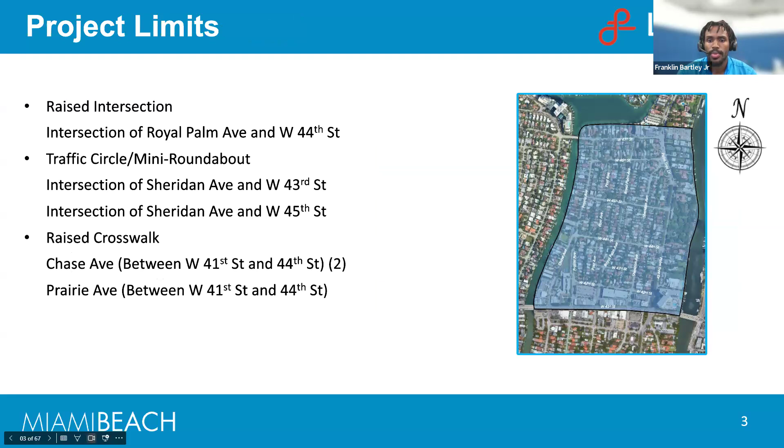So these are a few of the devices we'll be going over today: the raised intersection, the traffic circle, mini roundabout, and raised crosswalks. We'll also be implementing speed tables and speed humps at various locations as well.

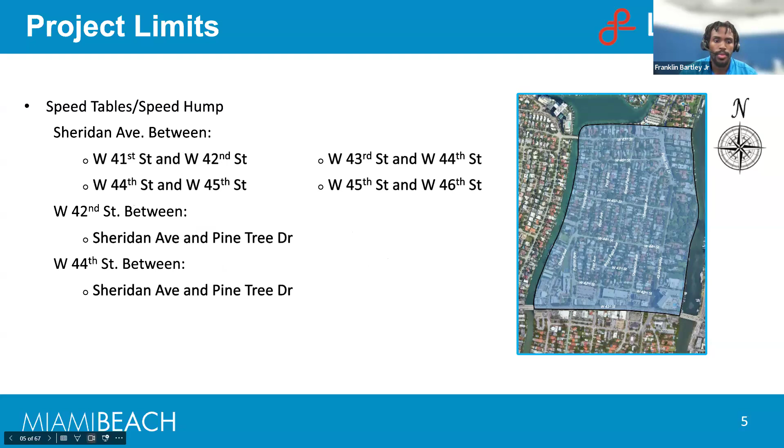Our design process was meant to really adhere to ensuring that everything is data driven, both effective and inclusive of community support and input. This is why we follow this project design methodology.

Preliminarily, we received some field concepts, then we go into preliminary designs, which are the 30% plans — early stage plans created just to detail the proposed improvements. Then we have to gather community input from residents, city officials, and city staff. This is where we are right now, currently in this community meeting to gather that input. We've already sent out the 30% design for their input as well.

Our final design will be finalized through integration of comments from city staff and comments also provided by the county. They will ultimately be the governing body that approves the permit set of this traffic calming design plan in order for us to go to construction with it.

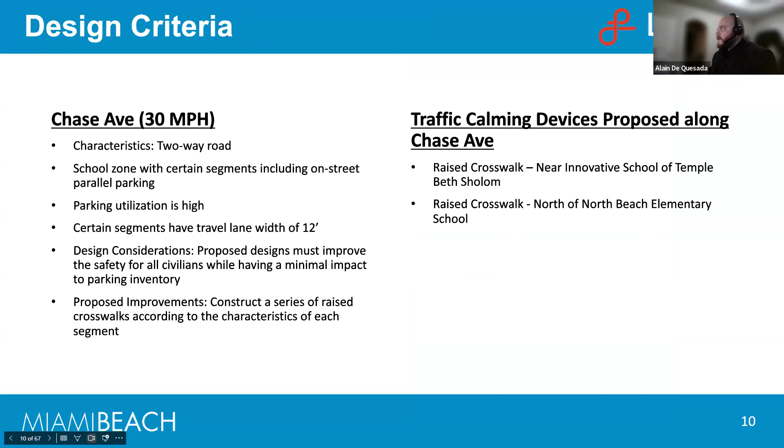This is a 30-mile-per-hour road, and the proposed improvements are raised crosswalks. The raised crosswalks will constitute an elevated platform that allows pedestrians to safely cross the street. The proposed design elevates the street approximately 6 inches to be flush with the proposed curb and gutter. New signing and pavement markings will also be provided to alert motorists as well as pedestrians to the new raised crossings.

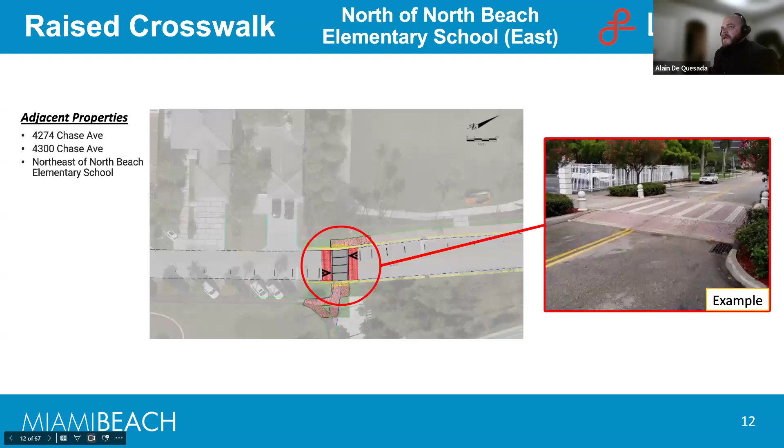Existing parking will not be affected aside from a handicap parking space located near Innovative School of Temple Beth Sholom. The impacted handicap parking space is to be relocated 20 feet to the south of its existing location. To prevent any drainage issues with the proposed raised crosswalks, we are proposing a channel gutter to convey the water to its appropriate inlets.

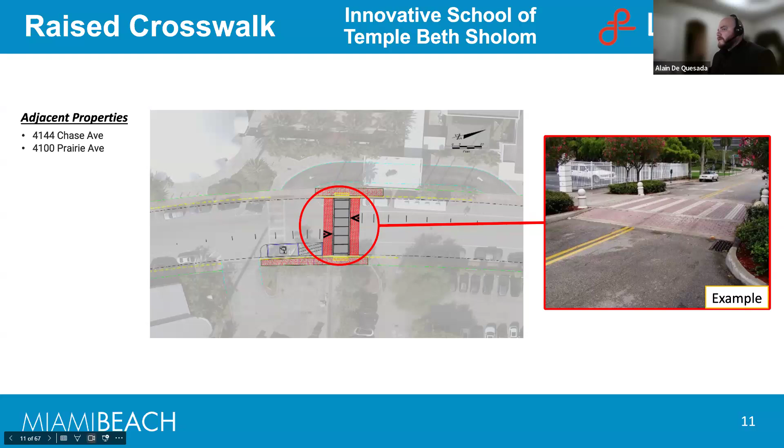Our next location is Prairie Avenue between West 41st Street and West 44th Street. This is a 30-mile-per-hour road that also constitutes a raised crosswalk. As you can see, we have connecting sidewalks, which will allow pedestrians to better cross the street, as well as have no impacts to the bicycle lanes.

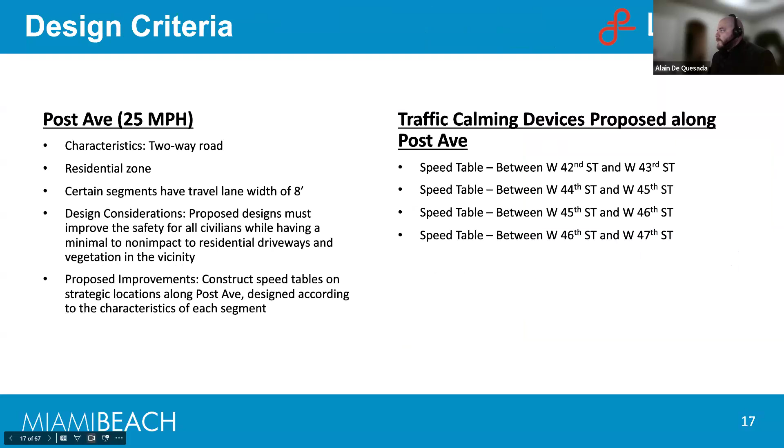Our next location is Post Avenue between West 42nd Street and West 47th Street. This is a 25-mile-per-hour road, and it constitutes 4 speed tables: one between West 42nd and 43rd Street, West 44th and 45th Street, West 45th and 46th Street, and West 46th and 47th Street.

Speed tables and speed humps will constitute an elevated road, 4 inches, at designated locations for traffic calming purposes. New signing and pavement marking will also be provided to alert motorists to the new raised speed tables and speed humps, as well as no existing bicycle parking or bicycle lane is to be affected or modified based on our proposed location.

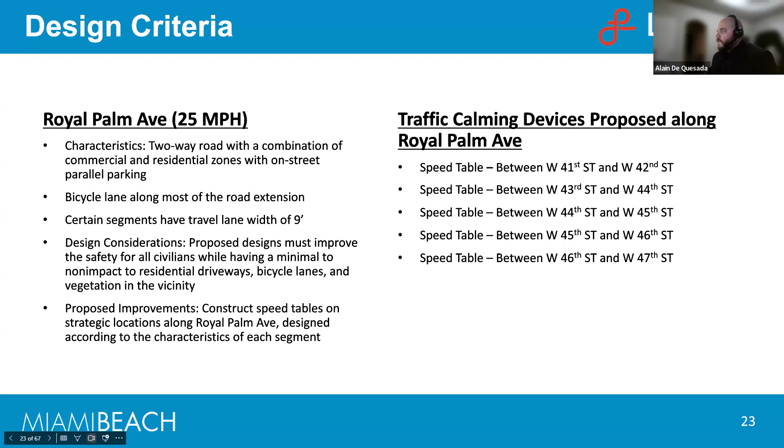Our next location is Royal Palm Avenue between West 41st Street and West 47th Street. This constitutes several speed tables between West 41st and West 42nd Street, West 43rd and West 44th Street, West 44th and West 45th Street, West 45th and West 46th Street, and then West 46th and West 47th Street.

To prevent any drainage issues with the proposed speed tables and speed humps, we are sloping the outside edge of the speed tables and speed humps 6 inches from the edge of pavement or bicycle lane. This will prevent any ponding associated with the raised pavement.

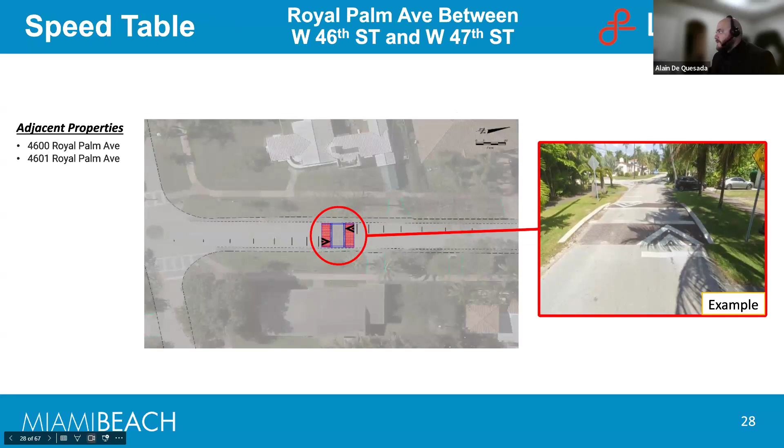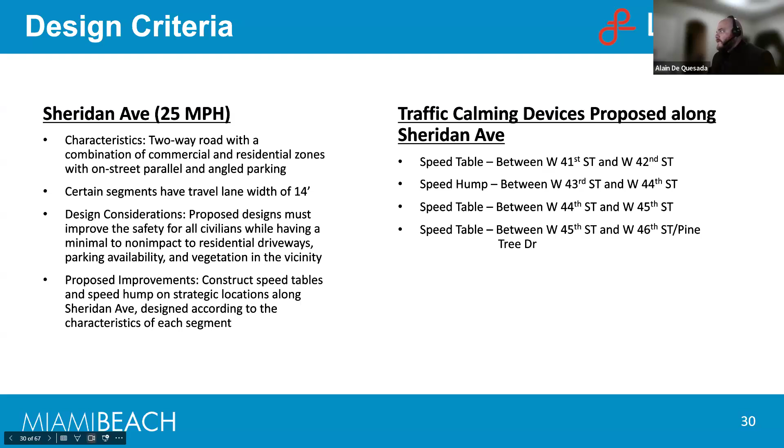Our next location is Sheridan Avenue between West 41st Street and West 46th Street. This is a 25-mile-per-hour road that will constitute 3 speed tables and 1 speed hump, located between West 41st and West 42nd Street, West 43rd and West 44th Street, West 44th and West 45th Street, and West 45th and West 46th Street, which is also named Pine Tree Drive.

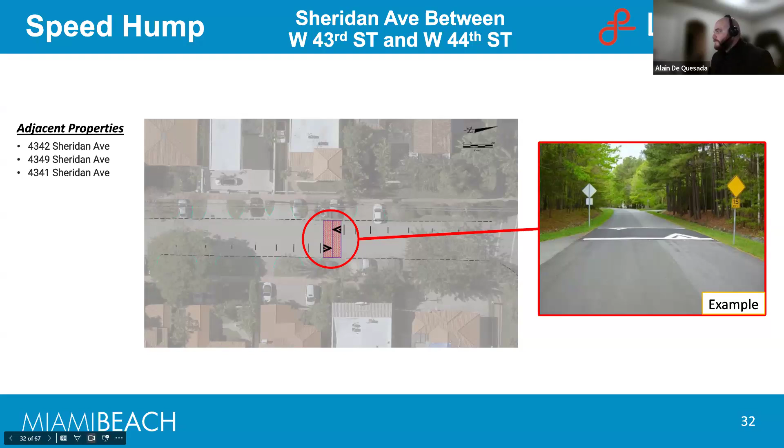Again, as you can see, there is no parking being affected, as well as no bicycle lanes being affected. As you can see, though, there's some parking that current residents use in the swale area. This is where we have gone with the compromise of a speed hump, which is, instead of giving a flat 10-foot surface, just 2 6-foot raised edges. New signing and pavement marking will be provided to alert all motorists of the incoming traffic calming device.

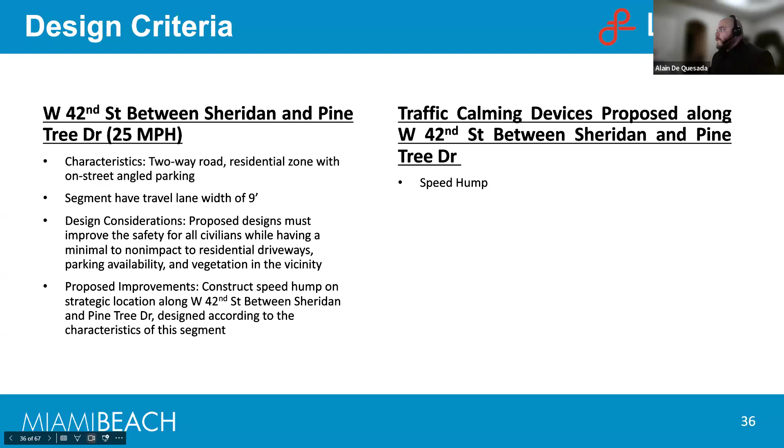Our next location is West 42nd Street between Sheridan Avenue and Pine Tree Drive. This would only constitute a speed hump.

This area, although not clearly shown here due to ongoing construction, as we develop the project we'll get a newer survey that would allow us to understand how the building is being developed and to better locate the speed hump to have less adverse effects on any type of proposed driveways, entrances to a garage, or parking.

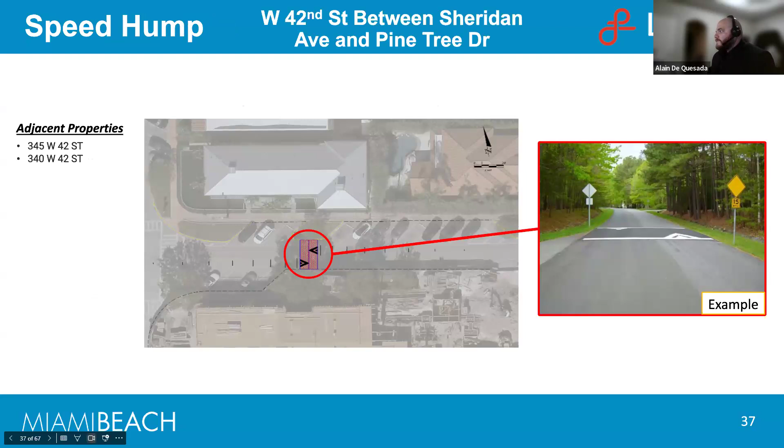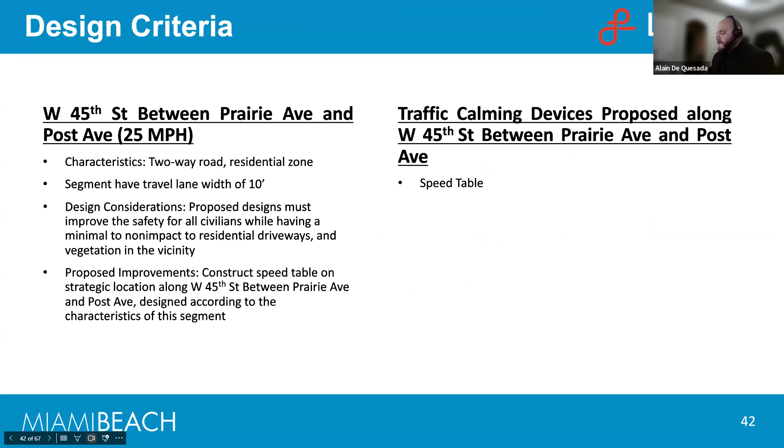Our next location is West 45th Street between Prairie Avenue and Post Avenue. This one again only constitutes one speed table as shown here. To the south of it, although it seems like we're blocking driveways, this is currently used by residents as parking. It's not a designated parking, so this would be some coordination with the residents to better allocate the area and to come up with a good compromise.

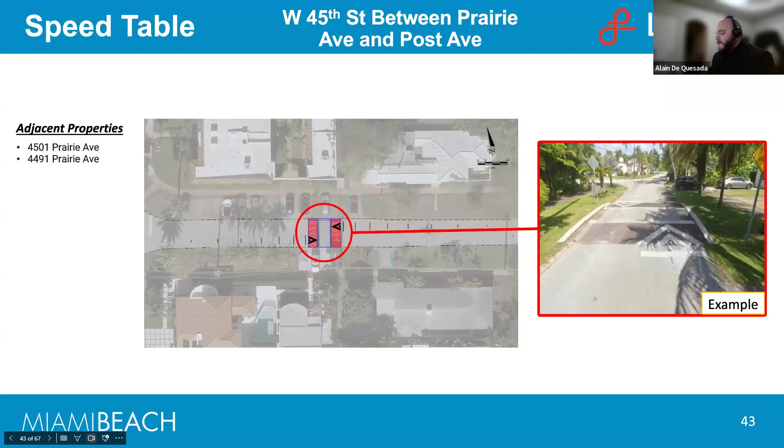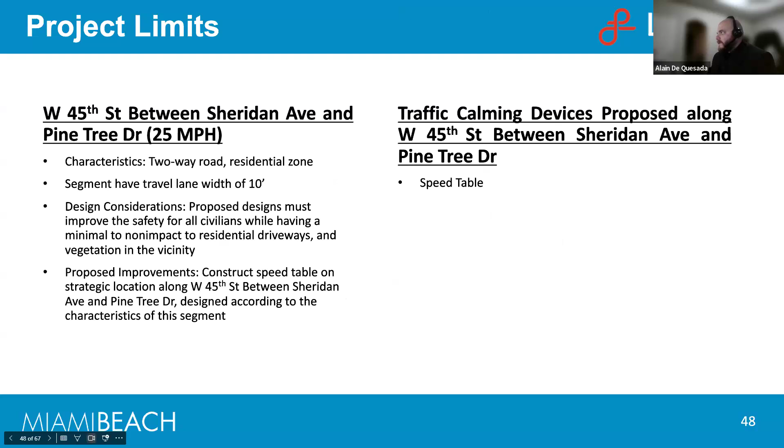Our next location is West 45th Street between Sheridan Avenue and Pine Tree Drive. Again, only one speed table is located there, and we have seen no issues with any parking or any residential amenities.

Our next location is West 46th Street between Post Avenue and Royal Palm Avenue. Again, this is constituted of one speed table.

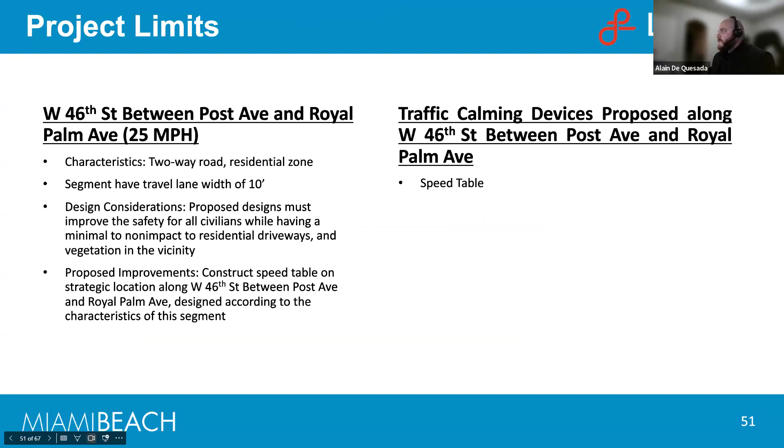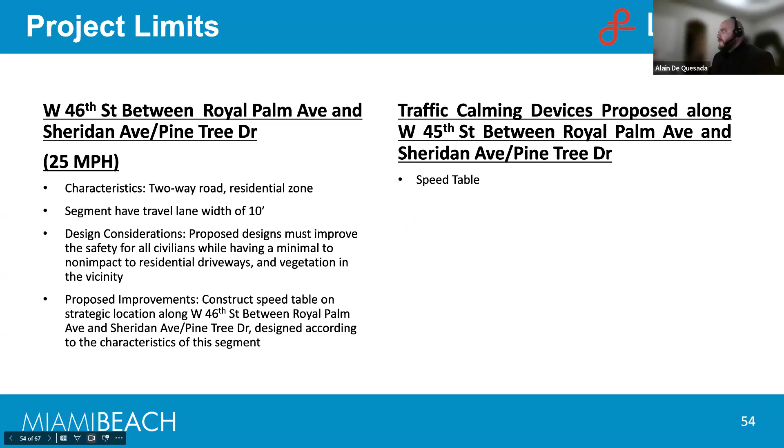Our next location is West 46th Street between Royal Palm Avenue and Sheridan Avenue / Pine Tree Drive. This, again, is only one speed table as shown there.

Our next proposed improvement is at the intersection of Royal Palm Avenue and West 44th Street. This constitutes a raised intersection.

The raised intersection will constitute raising the intersection approximately 6 inches, flush with the proposed curb and gutter areas as shown. New pedestrian crossings with pavers showing the new pathways will be added as part of the improvements.

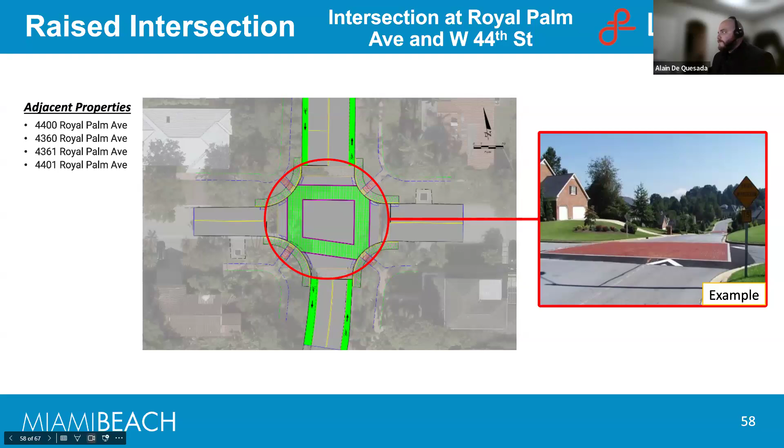Due to restrictions of water conveyance, new inlets will be added and connected to the existing drainage system for appropriate water flow. New signing and pavement marking will also be provided to alert motorists to the new raised intersection, and we will also be milling and resurfacing the road to better provide pavement markings and bicycle lanes.

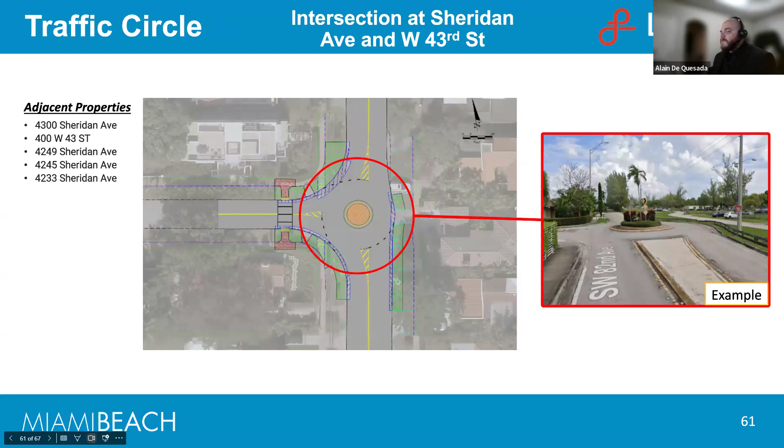The traffic circle will consist of a raised traffic circle approximately 25 to 30 feet in diameter. This will include new pedestrian crossings to accommodate the traffic circle and roundabout criteria for the safety of all pedestrians. New signing and pavement markings will be provided to alert motorists of the new traffic circle pattern. From this design, there is no drainage impact that will occur with the new layout.

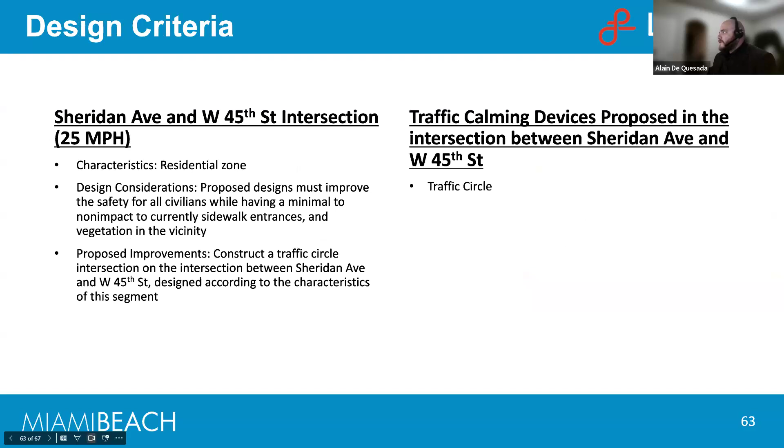Another intersection improvement is located at Sheridan Avenue and West 45th Street. This consists of another traffic circle, a 4-legged traffic circle with new crosswalks located to adhere to the new roundabout criteria.

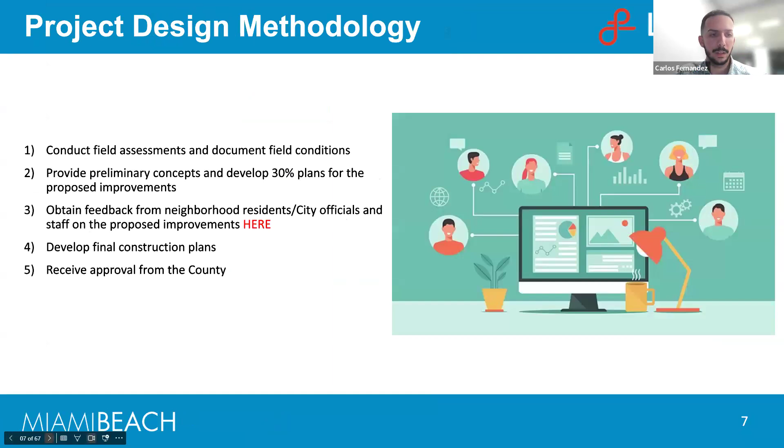Yes, we could definitely include that as part of the survey, especially the neighborhood-wide survey to obtain concurrence. Something to mention about the survey is that the county does require two-thirds approval or concurrence from the neighborhood in order to proceed. So it is very imperative that the majority of the neighborhood is in favor of the project. We'll make sure to include that as part of the survey ballot.

Well, Neil, you just said you need two-thirds. On this call, we only have 21 people. How many? Two-thirds of the responses received, not two-thirds of the residents of Orchard Park. Okay, thank you, I don't have an additional question now.

Jill, do you have one? Hi, my name is Jill Turner, I live with Mark on Prairie Avenue. I don't see what you put for speed tables or speed humps on Prairie Avenue on this.

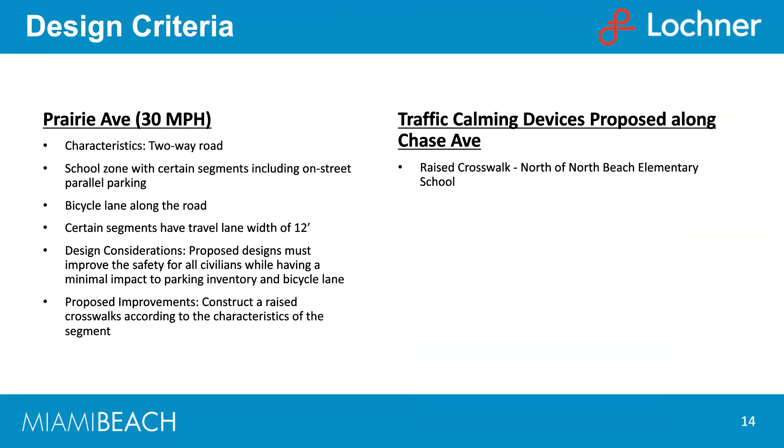That's the one, that's it. Prairie Avenue is also part of the standalone, what we're calling phase one, that's already at 100% design. And the traffic circle, as I may have mentioned earlier, there's a traffic circle on 44th and Prairie and a speed table to the north and to the south of the traffic circle. But that circle is being constructed once the underground construction that Public Works is doing gets implemented.

Otherwise, the circle would get installed and would have to get disturbed for the underground construction, because the majority of the work that Public Works has to do happens to be at that same intersection. So we're coordinating both projects. That's why it's not shown on this particular slide.

Is this where the crosswalk is that goes to where the bicycles are? No, Jill... wait, I think you may be correct. Yes, it goes to the Citi Bikes. Okay, and then north of that is where the circle will be, the intersection.

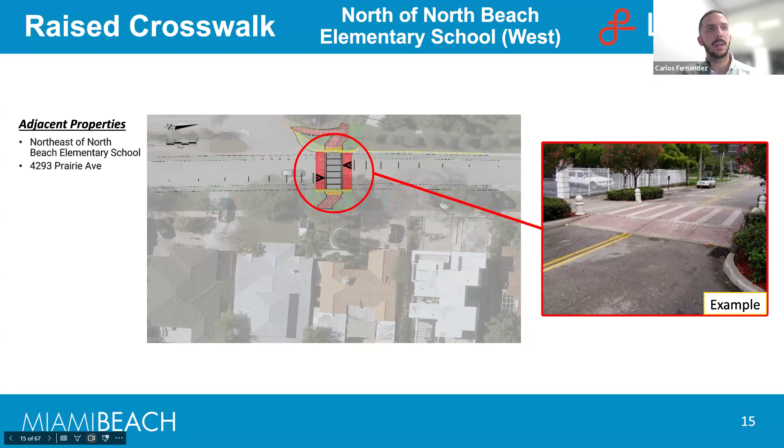Correct, correct. Thank you. So there will be a speed table at 42nd and Prairie where the crosswalk is that goes to the school? It's a little bit confusing, I guess, if you don't have a big map, but there will be a raised crosswalk that we're showing right here, both to the east and to the west, one on Chase and one on Prairie, basically on either side of the Citi Bikes that are in that middle portion.

And then in the standalone project, you're going to have the roundabout with some speed tables, I believe, to the north and to the south of the roundabout. I'm referring to the south of where you're talking about at 42nd, where 42nd comes into Prairie. That has crosswalks from both the north and south side of 42nd to get to the school.

I thought that was going to be a raised speed table. There's nothing there, it's not showing. You see where- Yes, I don't believe that's part of this project. I don't think we have a design. And we could, Mr. Bill, we could definitely look into that a little further.

I know the county usually is not open to having traffic calming devices within school zones due to the school buses, but this is definitely a conversation that we can have and try to find some sort of solution for that intersection. But thank you for that feedback.

What do you have over at Nautilus? You've got a speed table and a circle right in front of the school. Correct, we'll do that research and we can get back to you with that. Thank you.

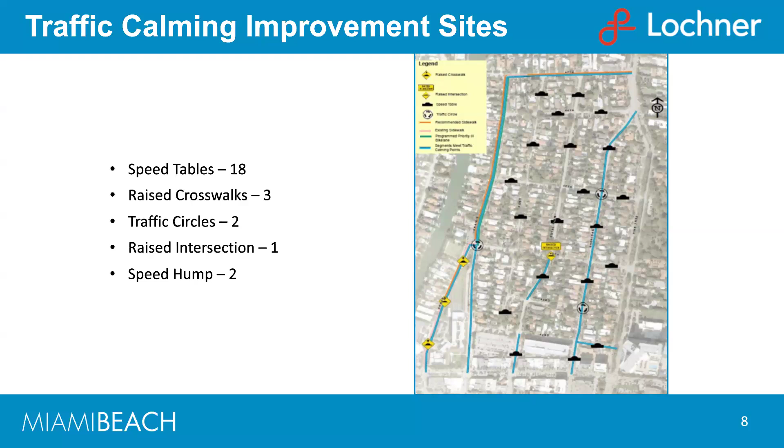Also, the proposed speed table at 4293 Prairie, the crosswalk to Muss Park has a stoplight, you push the light and the kids all cross. Does everybody know what I'm talking about? Yes. But going from there to Prairie it's just going to be a speed table. You should consider putting some flashing lights on that area, because this is the school, and I take my grandchildren across this and people fly through it even if it's marked. Maybe having it raised will help, but take a really good look at what's going on Prairie, I would really appreciate it.